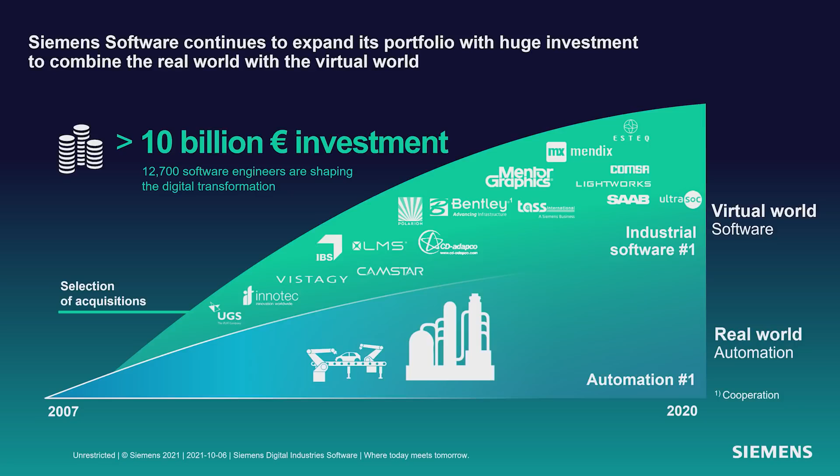One of the reasons we're able to do this is our investment. Over the past 14 years, we've invested more than €10 billion in bringing in new functionality to Siemens. In fact, Siemens is one of the top 10 software companies in the world. This allows us to bring you Xcelerator. Xcelerator is an integrated portfolio of software, services, and application development platform that really speeds your digital transformation. So no matter what you're doing, whether it's mechanical, electronics, manufacturing, we have you covered.

And it all starts with Solid Edge. Solid Edge is your on-ramp, if you will, to digital transformation. You're probably familiar with lots of Solid Edge capabilities for sheet metal, 2D drafting, etc. But maybe you need to go beyond that with the whole Solid Edge portfolio and Xcelerator, whether that's managing data, doing technical publications, simulation, electrical, it's all there for you.

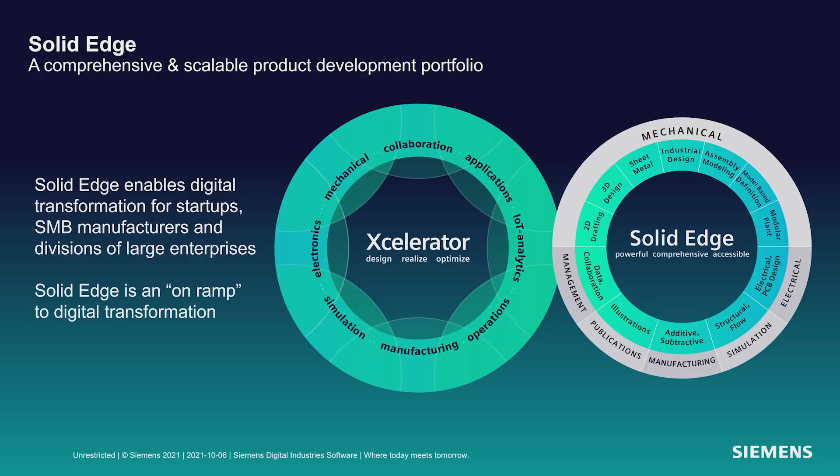And what we see is customers doing amazing things with Solid Edge and the Solid Edge portfolio. For example, Inovates. Inovates is a company in Belgium that makes mobile charging stations. And they're able to take Solid Edge and PADS Pro and use those two together to do great things. As you see, they don't find that level of integration in other engineering software.

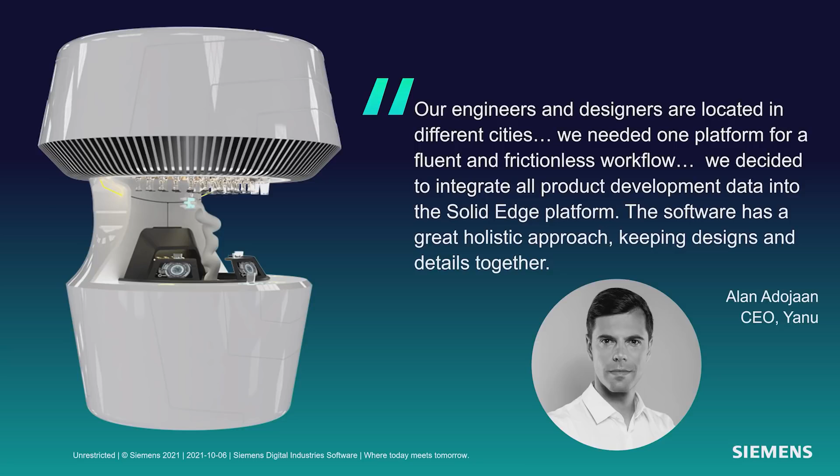Another great example is Yanu. They make the beautiful product you see on the left here. What product might that be? Probably something you've never seen before. This is a fully automatic digital bartender. It can recognize you, make the proper drink, do the proper billing, all contactless, very important today. And I love what Alan has to say. The software has a great holistic design approach, and that's what we like to see and how we can bring you more productive software.

So let's talk about Solid Edge 2022 itself. Solid Edge 2022, engineered to grow your business. There's so much in it, we'll only be able to cover some of it today. Things like Xcelerator Share, allowing you to collaborate with customers and suppliers. Or CAD Direct, integrating CAD files from other systems directly into Solid Edge seamlessly. Point Cloud Visualization, big scans of plants, being able to design your equipment in context of that big scan. Solid Edge Design Configurator, a whole new capability to configure your designs quickly and easily for your customers.

Now, as we go through our discussion today, we're going to be using two different data sets because there's just so much to see, such a broad range of functionality with Solid Edge. We'll be working with an espresso maker from Fiamma, a company based in Portugal. And we'll also work with a product from Bergner, a company based in Switzerland that makes chemical and pharmaceutical custom machinery.

So let's start by talking about mechanical design. And let's start with CAD Direct. CAD Direct lets you seamlessly integrate data from other systems into Solid Edge without translation and automatically take updates. We'll also talk about convergent modeling. We've been working on this technology for several years now. It's getting very sophisticated: the ability to integrate mesh models with BREP or solid models in one seamless way. So let's look at that with Jeff now.

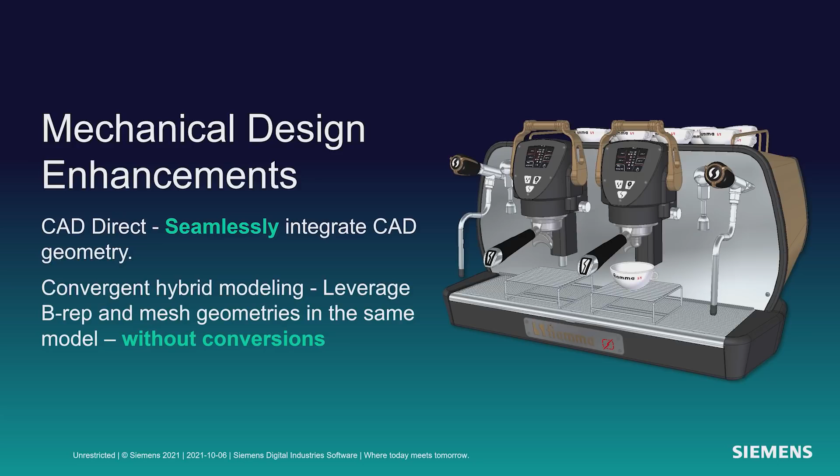Thanks, Dan. First, we'll take a look at subdivision modeling. In this example, we will add support members to the base of the Fiamma espresso machine. The new subdivision bridge command can be used to easily connect edges or faces of subdivision cages and create a lofted structure between them. Here you see an example of that, where we'll select the faces of each subdivision model that we want to loft between.

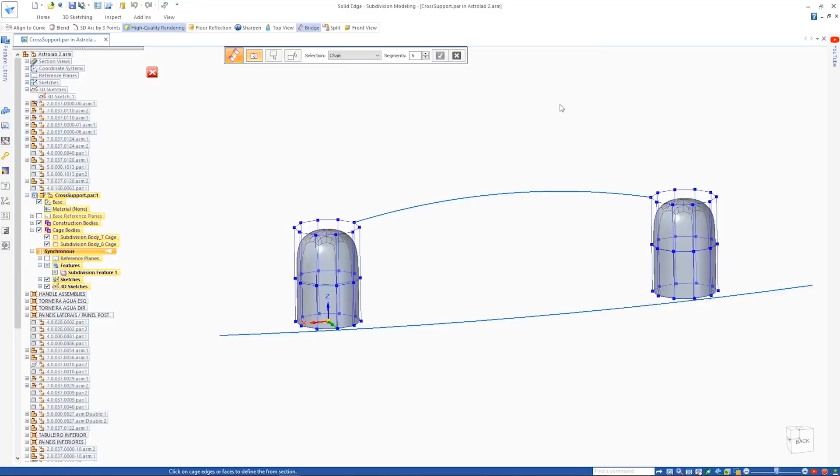Then we'll add the control curve to help us further define the overall shape. Next, we'll be using the new Align to Curve command to further define the shape of the part. Simply by selecting the cage vertices to define the direction and then picking the curve, those vertices automatically map to the curve. You can even sketch your own shapes and curves inside the context of the command. Even gesturing is supported for inking of your curves.

Here we'll show another option called Split with Offset to add some pockets to support the rubber feet of the support. A simple selection of the edges with an offset allows you to pull to create the pockets for those rubber feet. Next, we're going to replace the handle with a new design that's been 3D scanned.

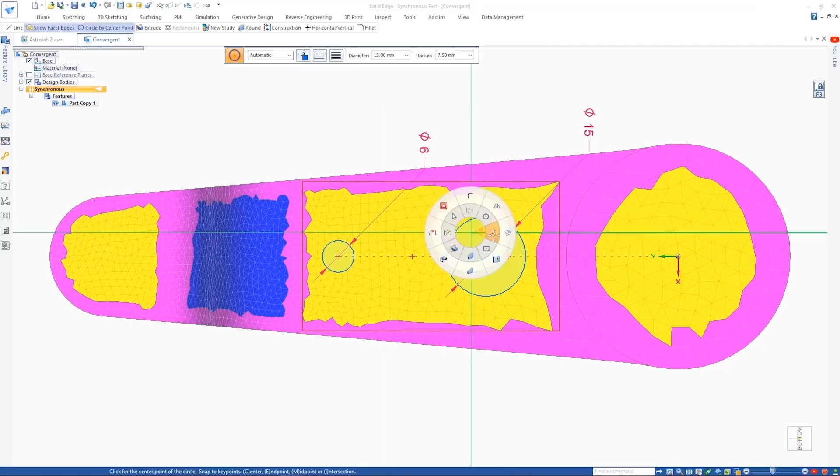This result is a mesh model that we import. We can visualize the mesh with the new Faceted Edge command. In this case, we'll clean up this model a little with the Remesh command. Now, faces have automatically been identified and the sketches are added to the planar faces of the mesh. We add a series of cutouts in order to reduce the weight and improve the appearance of the part.

Notice the resulting geometry isn't faceted. Solid Edge now seamlessly combines mesh and BREP geometry in the same body or part. We'll add additional cutouts to reduce the material. Once the cutout is complete, it can be patterned.

Finally, we're back in the assembly where we'll replace the current handle with the new meshed handle. But you'll notice the mounting holes are missing from the component. This can easily be solved by doing a Boolean operation using the mesh model as the target and the components from the assembly as the cutting geometry. These new capabilities further enhance your ability to use mesh models in your design process.

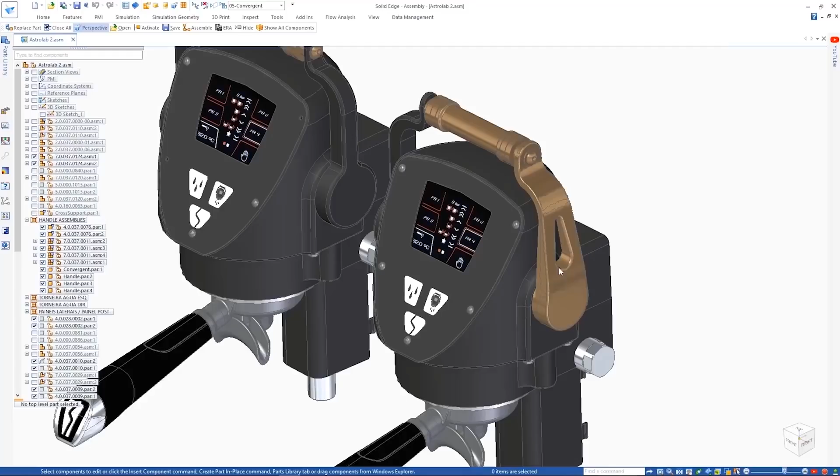Now we'll use the new component finder in the Solid Edge Pathfinder and we'll search for the desired filter holder handle, which is designed as a family of assemblies. One of the versions is designed for a double espresso shot, the other is a single espresso shot. Opening the drawing of this assembly, we'll use the new family of assemblies parts list to place a table and detail the parts used for each member.

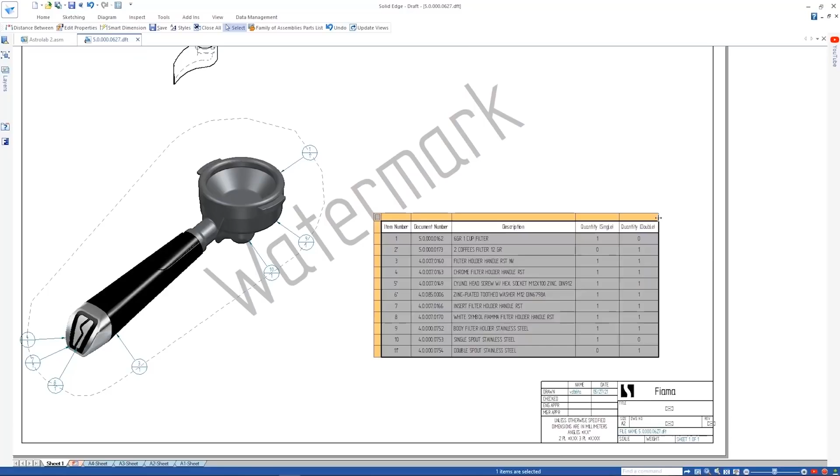Now we'll look at some enhancements to dimensioning in Draft. Dimensioning to virtual intersections or arcs of rounded edges is now supported. We can also choose to display projection lines to those intersection points. Watermarks are also used to convey important information on the drawing. We'll change the existing one so that it retrieves the document status for the drawing property text.

The new CAD Direct command enables us to use foreign CAD data, geometry, and assemblies in Solid Edge directly without requiring any translation. The water boilers that you're looking at here were designed in NX. Once inserted into Solid Edge, they can be positioned just like any other assembly. Since we need two of these, we'll simply copy one to create the second.

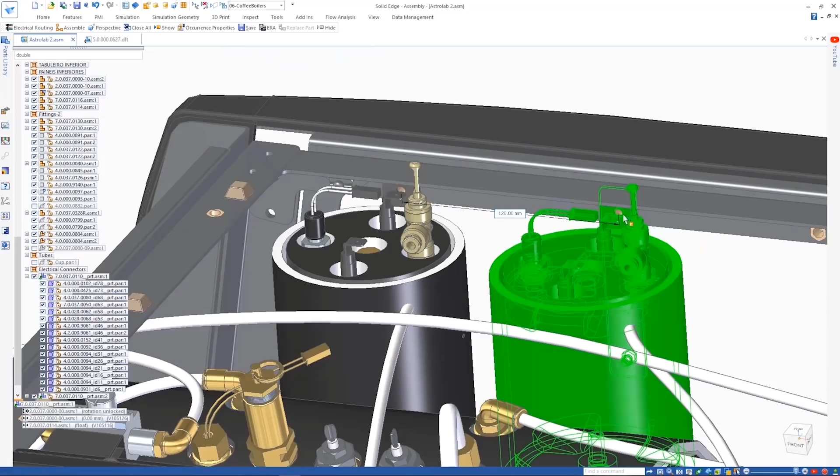Notice the boilers aren't quite in the right location. We'll go back into NX and make the changes needed to the mounting bracket such that they'll be in the right position. Since Solid Edge has associative links with NX, a simple update brings the changes in.

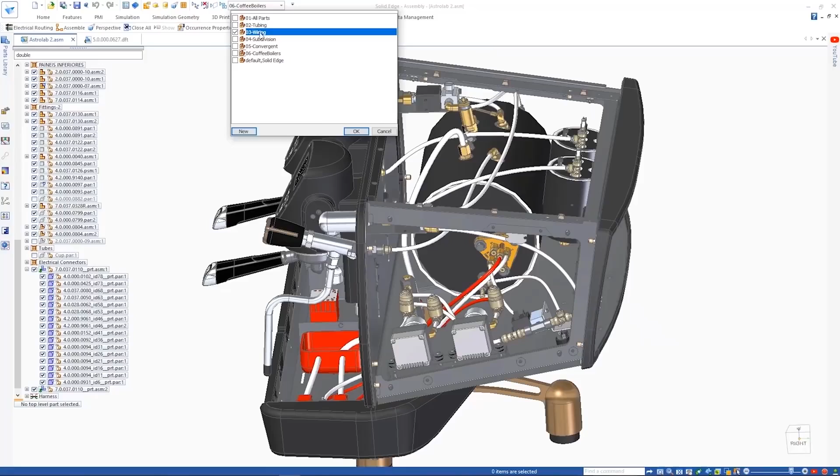Next, we'll look at electrical routing enhancements. Solid Edge now supports the display of bicolored wires, allowing us to change the display of this ground wire to be striped green and yellow. Various pattern types are supported as well, including single stripes, helical stripes, zebra stripes, and dashes.

And finally, KeyShot, the best-in-class rendering solution, also sees some impressive updates. Decals defined in Solid Edge may be automatically transferred, saving time and effort, which can be seen here on the logos and the cups in the digital scene. Back to you, Dan. Thanks, Jeff.

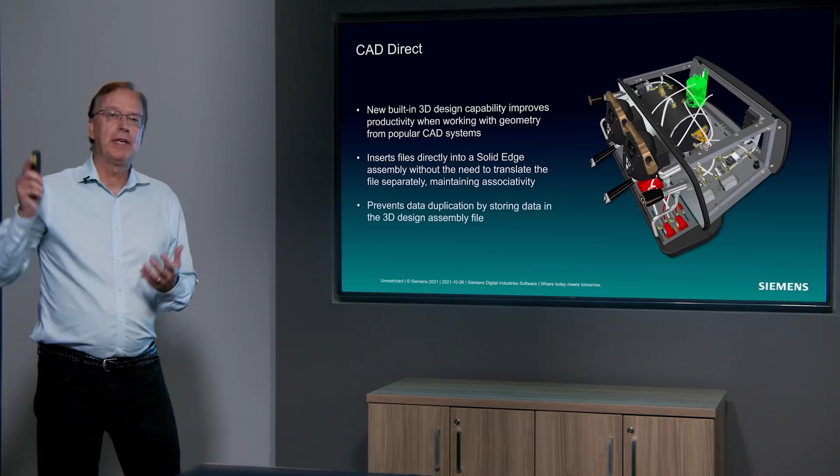Lots of amazing stuff in there, but I'm only going to highlight a couple things here that I think are real game changers. CAD Direct. So you have the capability you've seen to get an NX assembly into Solid Edge directly, no translation. And when you make edits to that NX assembly, it comes into Solid Edge automatically. There's no extra files to manage. You don't have to worry about that.

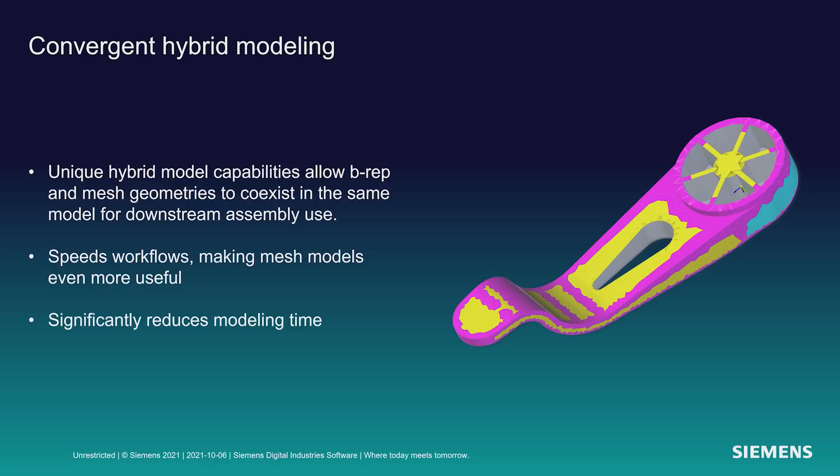It's all CAD Direct. And what about convergent hybrid modeling? You saw taking triangle meshes and b-rep solid models, pulling that all together into a single cohesive model, significantly reducing your design time. Let's talk about some other mechanical design enhancements, some other great things in here.

Point clouds. It's becoming fairly common to be able to scan an entire plant or factory and bring that data forward. We can now bring that data into Solid Edge so that you can design in the context of that factory or plant. What about large assembly modeling? We see people first building parts, then assemblies, then whole factory lines. Assembly modeling in Solid Edge keeps getting faster and faster, best in the business.

And Synchronous Radiate, an amazing new command within the synchronous modeling environment that allows you to deal with radially symmetric parts and edit those effortlessly. So let's take a look at that now, Jeff.

Thanks, Dan. Well, the first thing we'll do is we'll take a look at a new assembly preview mode. This mode allows you to very quickly open Solid Edge components and very large Solid Edge assemblies lightning fast. In preview mode, you can manipulate the view, show and hide components, and apply display configurations. In this case, we'll isolate the most critical part of the model that we want to edit using a configuration. Then we'll simply tell the system how we want to open, and open only the components that are to be edited, saving you time and memory.

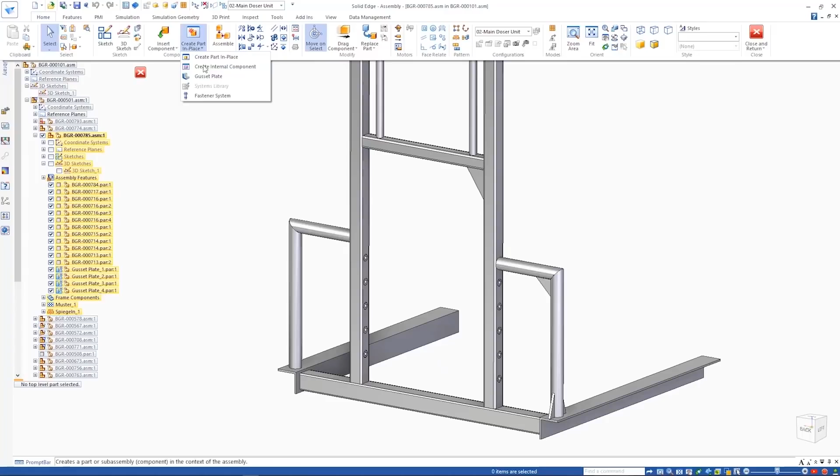Another time-saving enhancement is the gusset command. We now allow you to automatically add gussets to a frame structure. Here you can see the user interface. You can define these gussets in any shape and size that you desire. Then you simply select the frame element, position where the gusset is to go, and the system automatically creates the component there.

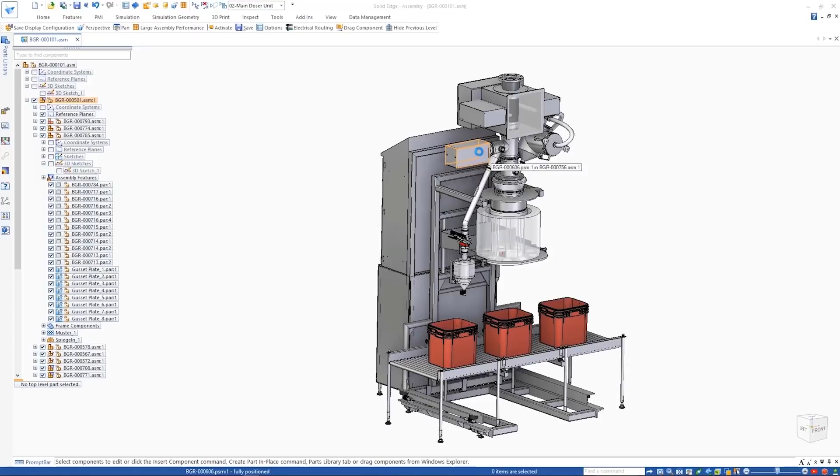If we continue down the internal components theme that we introduced in the last release, we now allow you to create an internal component and actually create the model geometry directly inside the Solid Edge assembly. We've introduced this new assembly modeling capability that gives you the ability to create the entirety of a design without any need for an external file. Here we have a pneumatic cylinder which will be imported as an internal component. We need to add a bracket to this assembly, but since it's a purchased part, we'll just create this as an internal component. And again, saving the need for external tracking of files.

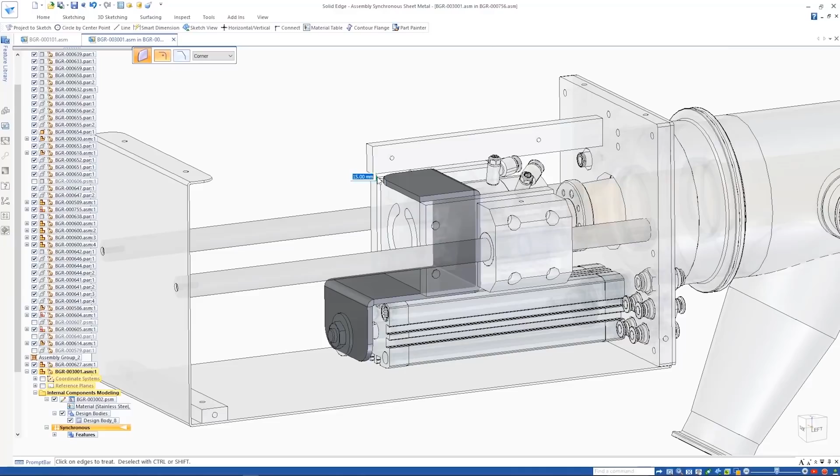If you'll notice during sketching, a pop-up menu allows you to quickly access commands that are relevant to your selection. And this is new for Solid Edge 2022. So we've defined our sheet metal part. We also will have to give it a material definition and a gauge definition. In addition, we're able to create geometry and reference the components from the assembly, whether they're internal components or they're real components in the assembly. So again, we're defining the material gauge for the sheet metal component, and we've defined this component completely inside the context of this assembly.

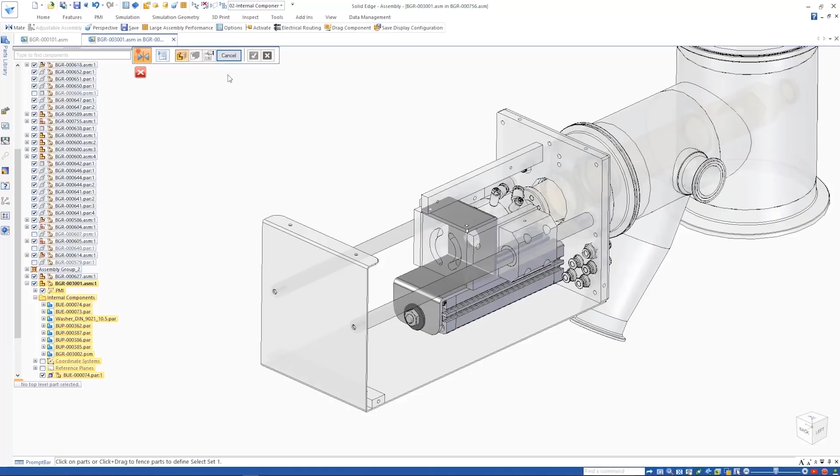You're also able to drag the component, doing animations using both internal components as well as the real component combined. The new component finder speeds up the process for locating parts within the assembly. You simply key in the name and it finds the list quickly. Here we found a shaft, and we use the new radiate command to edit the radius or the diameter of the shaft component. You simply select the shaft, putting the component in the select set that you wish to change, and then Synchronous does the rest. In this particular example, we want to include the pocket in the radiate and the offset option. Simply selecting that pocket and including it allows that to be done.

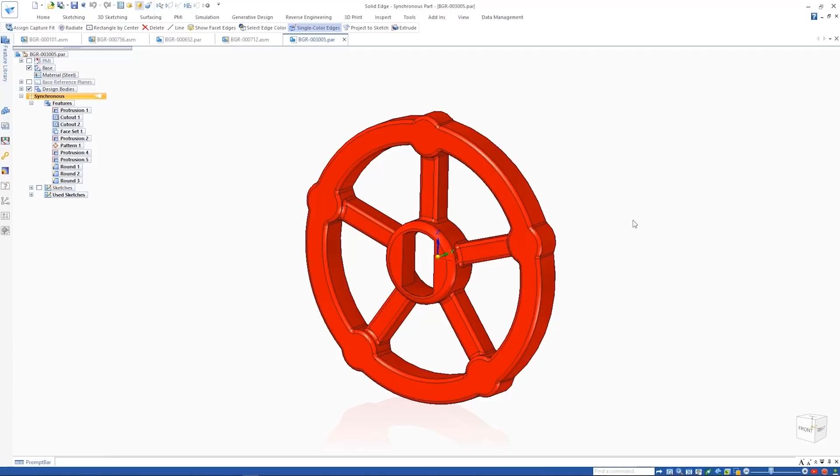A new Assign Capture Fit command allows relationships to be predefined on a component while in the context of the part. Here you can see that Capture Fit relationships already exist. We'll add a new Capture Fit to the collection and save it to the component. When I place the handle into the assembly, all you have to do is select the component and select the mating components that you want to mate it to, and the handle automatically snaps into place. It's as easy as that. Here's another example where we have a handle that needs to snap to 5 new locations. Again, the Assign Capture Fit makes it easy.

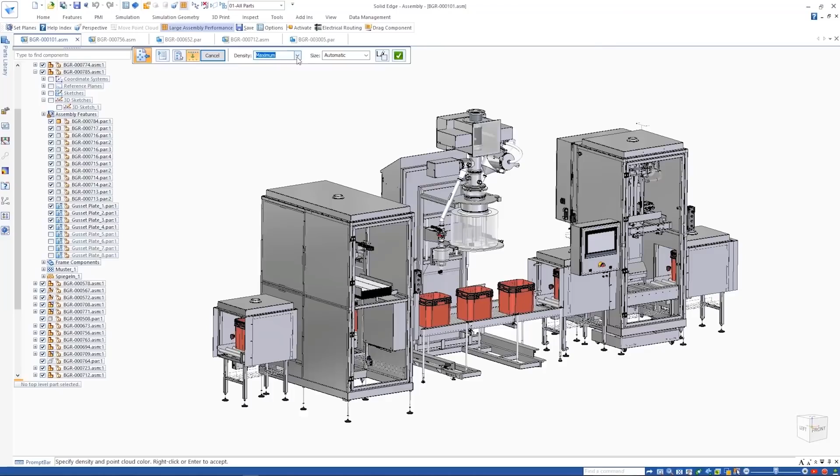Solid Edge now has the ability to place point clouds within the context of your design. This allows you to reference and visually indicate where your components will be placed inside a large assembly. Solid Edge supports multiple point types and then allows you to position your component inside the context of the plant design. The point cloud can be easily repositioned. Clipping planes can be used. You can even measure to the location of the point clouds relative to your design. Here you see that the tank component was in the wrong position and it was moved to match the point cloud and the plant definition more precisely. And that's it, Dan. Back over to you.

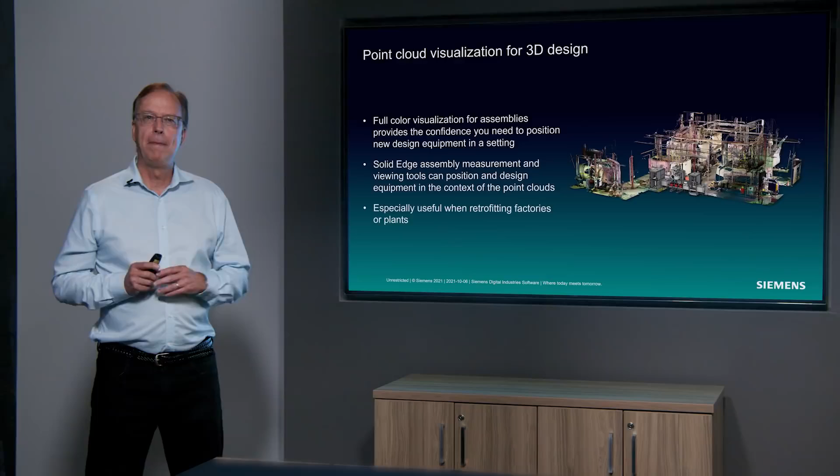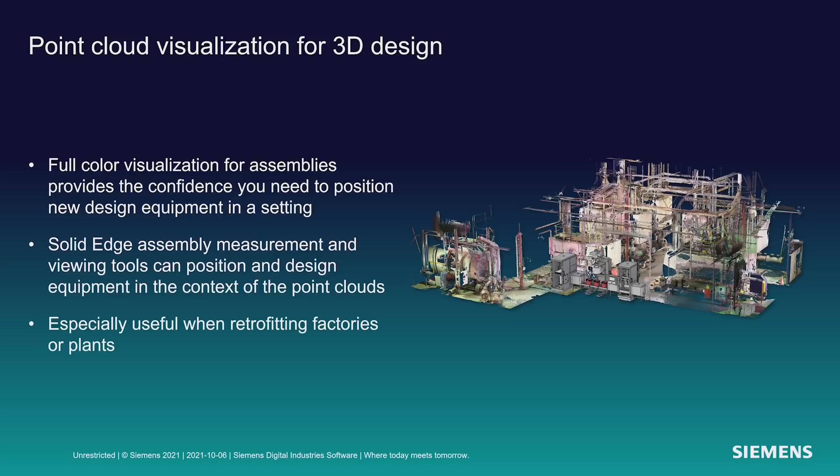All right, thanks, Jeff. So many great things to see in there. But again, something I really want to highlight to you is a game changer: point cloud visualization. The ability to take scans in, gigantic scans, millions or billions of points, and be able to look at those in the context of Solid Edge and be able to integrate your design directly in there and design in context of that point cloud. As you can see, they're full color, they give the full feel of the plant or factory. Really amazing stuff. And we see that our customers really love this new technology. So Benjamin at Bergner, for example, eliminated a lot of tedious manual effort. It's just so much easier with the new point cloud technology.

And what about large assembly modeling itself? Order of magnitude increase in large assembly modeling performance. So you have that preview mode where you can very quickly bring up the assembly, very, very massive assemblies, decide what you want to work on, and then just bring in that bit of the assembly. Really improve your productivity.

And we see that folks are already taking advantage of this. Our beta customers have been using this, like Luca Carminati at CMS. Much, much faster work, save a lot of work on their designs.

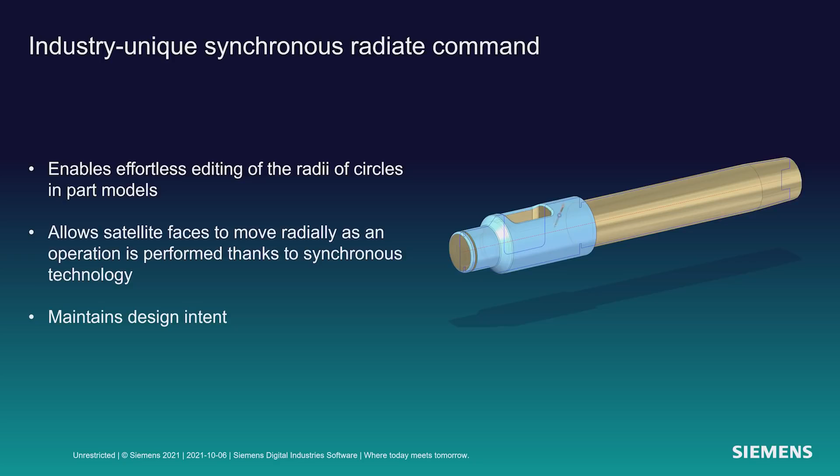And what about synchronous radiate? Really amazing stuff if you're working on those axisymmetric parts. Being able to make edits without having to do any extra effort happens almost magically. Great stuff.

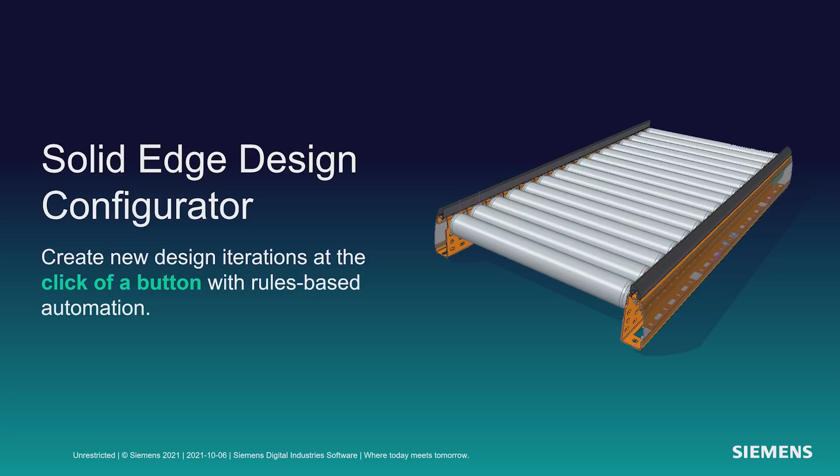Okay, next up is Solid Edge Design Configurator. I'm very excited about this. If you're doing any engineer or configure to order type of products, the ability to very quickly change your designs and have new quotes very quickly. Let's take a look at it with Jeff.

Thanks, Dan. The new Solid Edge Design Configurator allows you to design multiple product variants directly in the context of Solid Edge. In this example, we'll configure a variety of conveyor designs. The first step is to select the component to be configured. The next step is to define the master input parameters of the configuration. In this case, it's the length and width of the conveyor plus the pitch of the rollers.

Values can be easily edited for any parameter, and images can be included in order to help the end user identify the needed inputs when configuring the model. Defining a new input parameter for the pitch of the conveyor, we will quickly configure the name, type, label, and render style to use radio buttons. The pitch value of the conveyor can be customized between 60 and 90.

However, since different lengths of the conveyor require different pitches, visibility rules need to be applied. This is done by making use of a simple expression to define the intelligence. Here, the rules are being validated to ensure the consistency and proper definition have been made. Here, the function is going to be copied and pasted to allow you to easily reuse formulas without having to include them again. Skipping to the last step of the configuration, we can see the configuration form is properly created.

Next, defining the rules for the process. Here we have multiple rules to drive and configure the connectors at the bottom of the conveyor. We will use a combination of simple condition and expression rules and a truth map table to work out the number of positions of the connector. All rules can be quickly validated.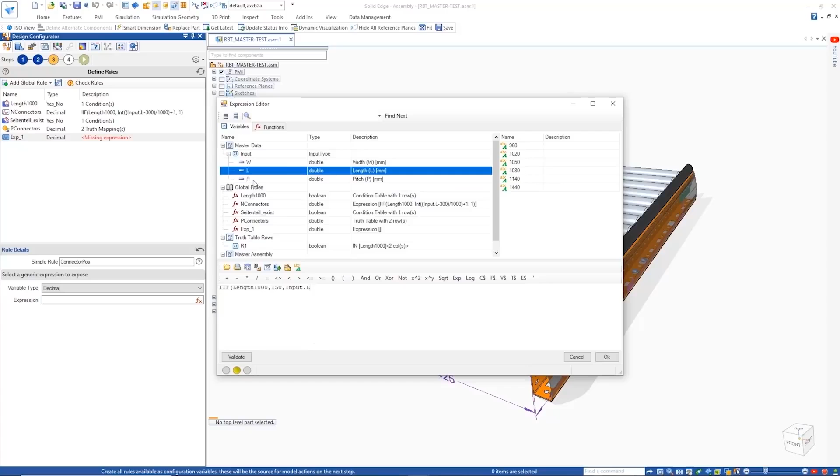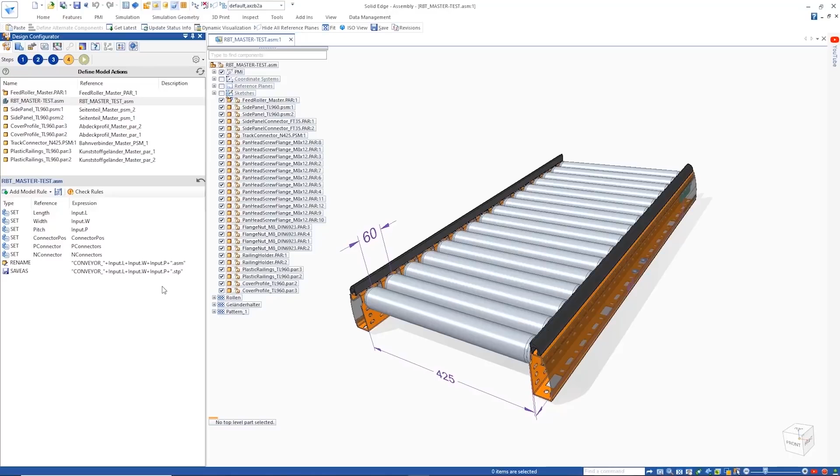Finally, we specify the actions to be taken. Here, variables are set and components are replaced to satisfy the input parameters. A rename model action will ensure our final assembly will be renamed appropriately and also create the other necessary outputs, for example, a STEP file as shown here.

Now we can run it quickly and create as many configurations as needed. A newly generated configuration can easily be shared with Pack and Go. The configuration logic is all stored within the CAD model. There's no need for any further plugins or external resources. And with that, Dan, I'll hand it back to you. All right, thanks, Jeff.

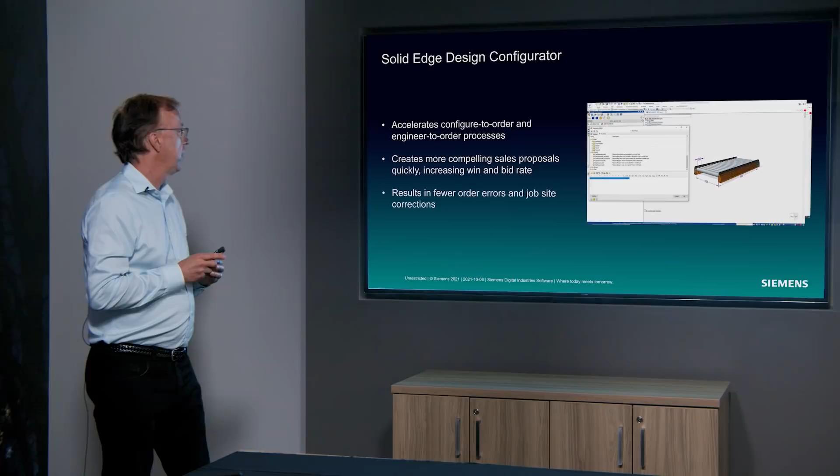So as you see, with the Solid Edge Design Configurator, you can accelerate your configure to order and engineer to order processes and create compelling sales proposals. You're also going to see that it really error checks for you and it creates a nice dialogue for your users to interact with so you can very quickly configure new products.

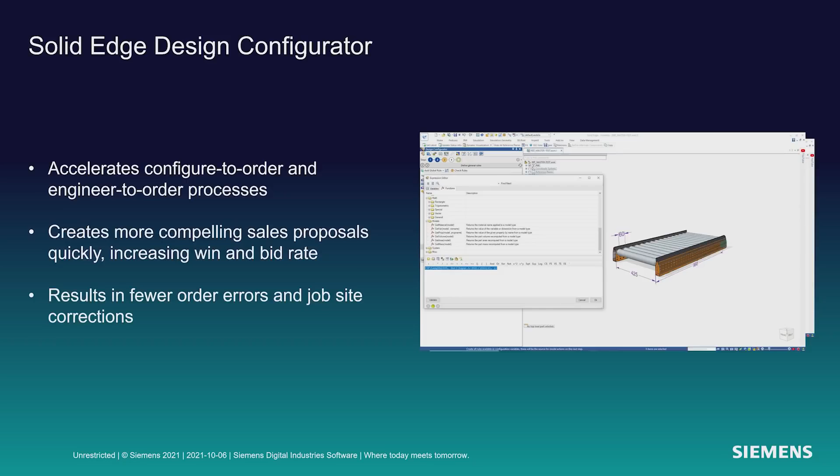What about CAM, Solid Edge CAM Pro? Tried and true technology developed over the last 40 years. A lot of users using it today and enjoy the benefits of it. But what if that technology was available to all of you, all Solid Edge customers on maintenance? That's what we want to introduce to you today with Solid Edge 2022. Jeff. Thanks, Dan.

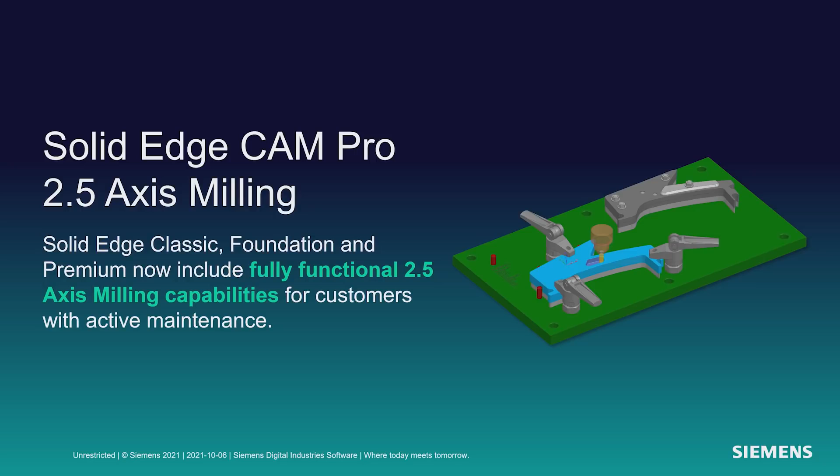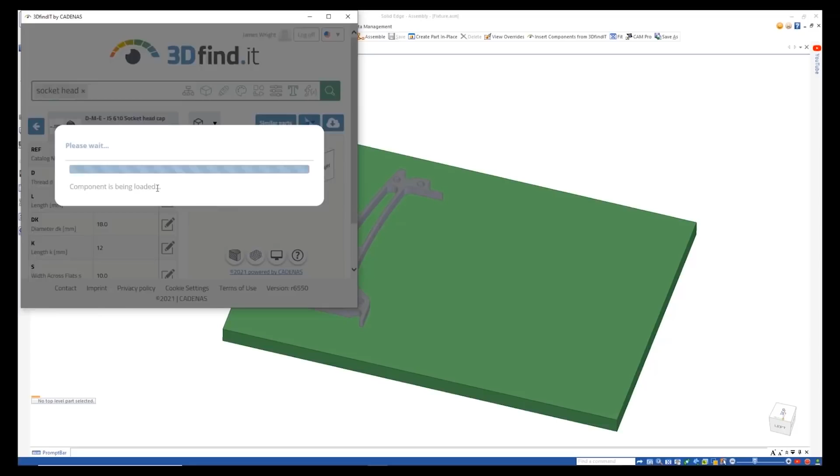Here we'll be using Solid Edge CAM Pro to create the manufacturing toolpath for the rear legs of the Fiamma Espresso machine. First, we'll use the Solid Edge assembly tools to create the shape to represent the stock parts, and also the parts that form the fixture assembly, which includes the standoff plate as well as additional fixing pins from the standard database. We will also make use of supplier catalog in 3Dfind.it to get the appropriate socket head cap screws to be used to fix the component in the fixture. So as you can see, Solid Edge is a great CAD for CAM tool.

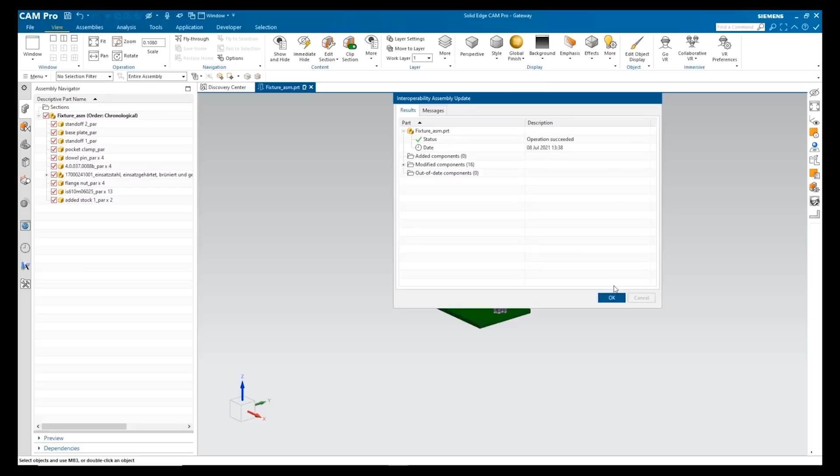We'll need to machine this in two separate steps. Step 1 is to mill the pocket and drill the holes, and step 2 is to machine the profile. One click will send the entire assembly to the Solid Edge CAM Pro application. Note that associativity is maintained to the complete assembly, so if there are any last-minute changes, we can quickly update them and continue the NC programming process.

New for Solid Edge CAM Pro is the ability to create adaptive roughing toolpaths for 2.5-axis operations. This is included at no additional cost. These are faster than traditional toolpaths and extend the cutting life of your tools. Notice the advanced graphic capabilities for validating your toolpath.

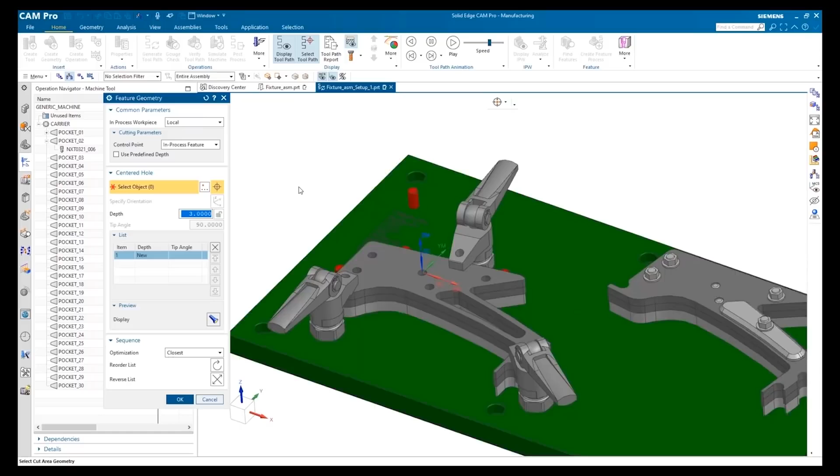Here we'll create spot drilling operations for the 5 holes in the support. Notice the graphical pop-up hints that help us with operation selection. Graphical helps are also available for geometric selection. Each time we select a hole, we get a preview of the machining that will take place. Again, at any point in the process, we can get visual feedback on our decisions.

Now that our CNC program is complete, let's run through the whole visualization process. Notice you get to completely visualize the entire machining process before committing it to machining. Of course, no job is finished until it has been post-processed for a specific machine. That's where PostHub comes in.

It's an online database of over 1,200 post-processors. You can easily filter and find exactly the one you need. Also, PostHub is constantly updated, bringing you the most recent tools. And Dan, with that, I'll turn it back over to you.

All right, thanks, Jeff. I'm really excited about this. There's a great heritage in Solid Edge CAM Pro and our machining technology over the last 40 years. Many people enjoy that technology, but now every Solid Edge user who's on maintenance can enjoy that technology and work with Solid Edge CAM Pro.

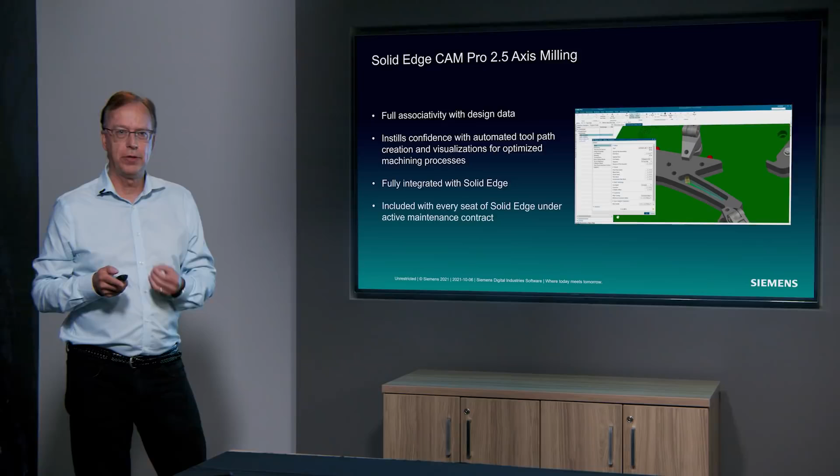Next up is Xcelerator Share. I'm super excited about this. It's a functionality in Solid Edge that allows you to collaborate with colleagues, suppliers, customers very easily. Nothing for you to set up, works on all sorts of devices. So let's take a look at that.

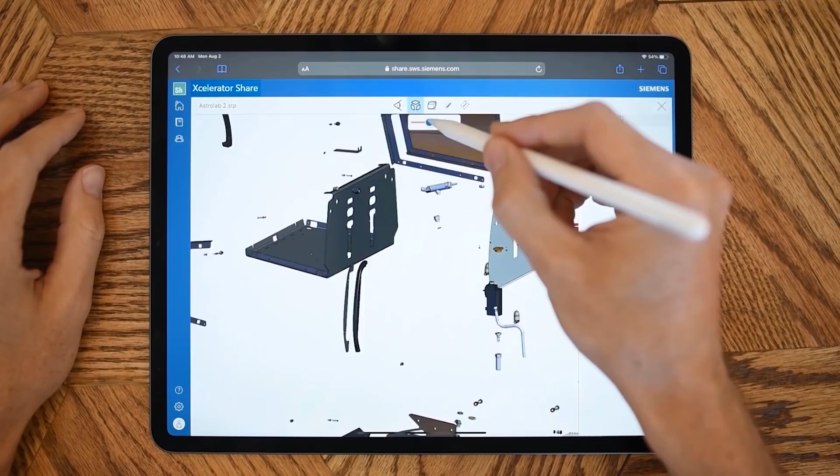Jeff. Thanks, Dan. Xcelerator Share allows you to import your CAD models into a secure cloud location. Within that context, you can view, you can rotate, you can show/hide, you can 3D section, you can even do measurements and markups. Here, a reviewer has identified the need for some change in the design. The location of the change is identified by a sticky note and a place describing the needed change.

Xcelerator Share offers maximum traceability, as all markups are recorded, enabling conversations back and forth on any of the issues you're tracking. It also records who made the markups and when they were made. We can also easily go back to the markups at any time. Simply save your markups and send them to the designer for review.

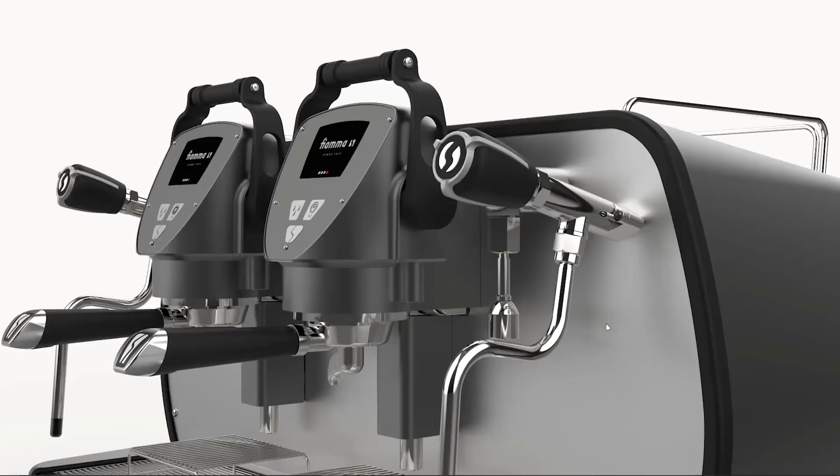With Share, you can also directly connect to Solid Edge, synchronizing your data from your desktop to the cloud. Here we have the same project on our desktop. It's represented simply as a folder. Any data that we have in this folder will get synchronized in the background.

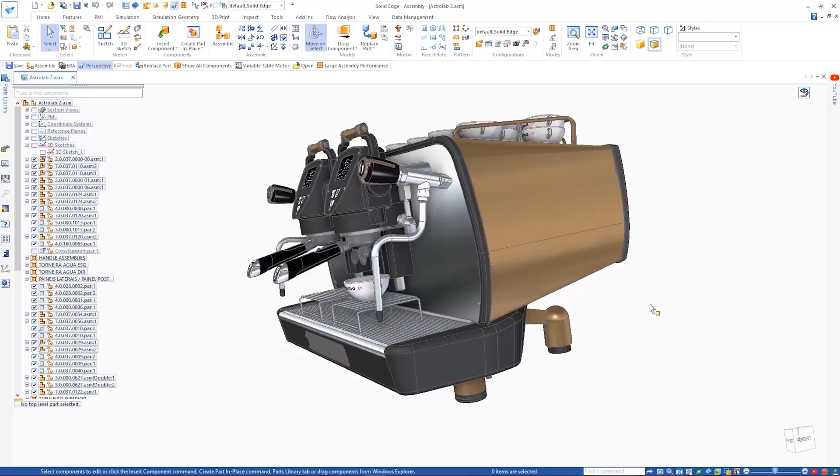In Solid Edge, we can securely sign in to Xcelerator Share and see those same cloud-based projects. The Espresso machine can be opened and we can go right to work on the part in question. The designer can easily access that same markup in the cloud directly from within Solid Edge. Once completing the change, another markup continues that two-way conversation and collaboration with other stakeholders so that the issues are tracked appropriately.

Another great feature of Xcelerator Share is the ability to share a project with anyone. Simply enter the email address of the person with whom you'd like to share and choose their access permission level. Here we can choose View, or View and Download, or Edit and Download, depending on how you want to protect your intellectual property. We'll share this design with one of your colleagues and our customers and give them the appropriate access.

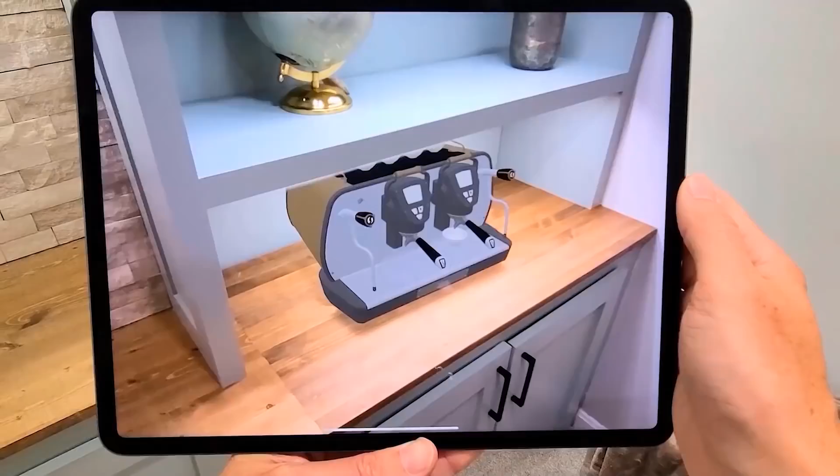Finally, with the Share Augmented Reality feature, you can see exactly how your designs will look in the real-world environment. Snap the design onto any surface seen in the camera lens at the correct scale. Finger gestures can be used to manipulate the model and easily visualize what your design looks like in a real environment. So back over to you, Dan.

Thanks, Jeff. All right, Xcelerator Share. Really great stuff. Next generation cloud-based collaboration that allows you to work inside your company with colleagues or work with suppliers, work with customers. Nothing for you to set up. Works on every device. So whether you have a Mac or an iPad or a Chromebook, it works on all those devices with no special setup. And you saw the ability to write notes that are automatically converted to text, share those markups. Very exciting stuff.

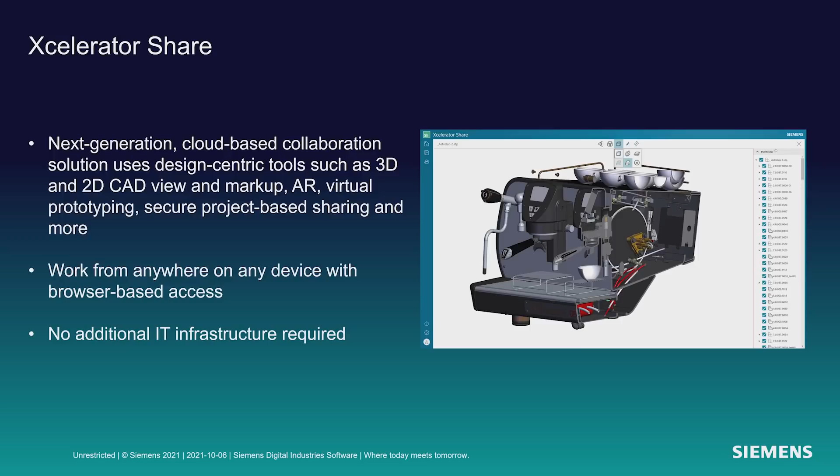Next up's dynamic visualization. You make complicated products, large assemblies. How do you know which parts are from which supplier? Or which parts are of what material? Dynamic visualization will help you with that problem. Let's take a look at that now with Jeff.

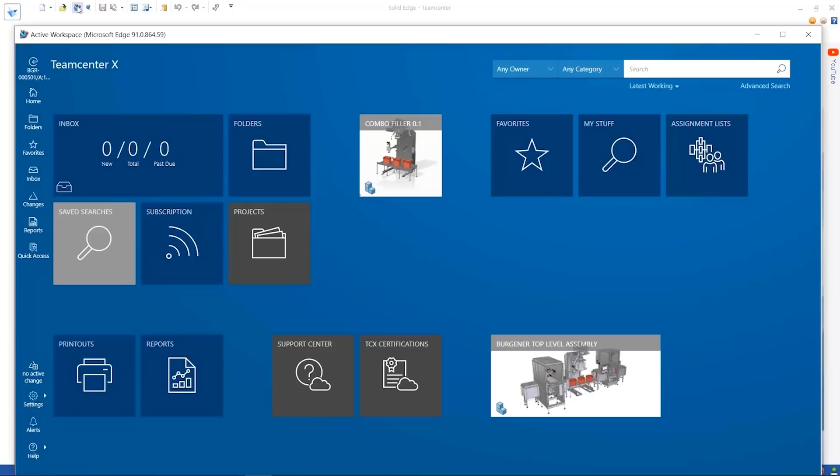Thanks, Dan. Dynamic visualization gives you the great capabilities to generate visual reports of your assembly. So what we'll do here is we'll open a Solid Edge assembly using Teamcenter Active Workspace. We'll create a visual report based on the component supplier and the material definition. So the first thing you'll do is you'll add columns to the user interface, those columns that you want to filter on. Here we've added suppliers and material. So for each of those, we'll filter on the particular material and the particular supplier that we're interested in visualizing.

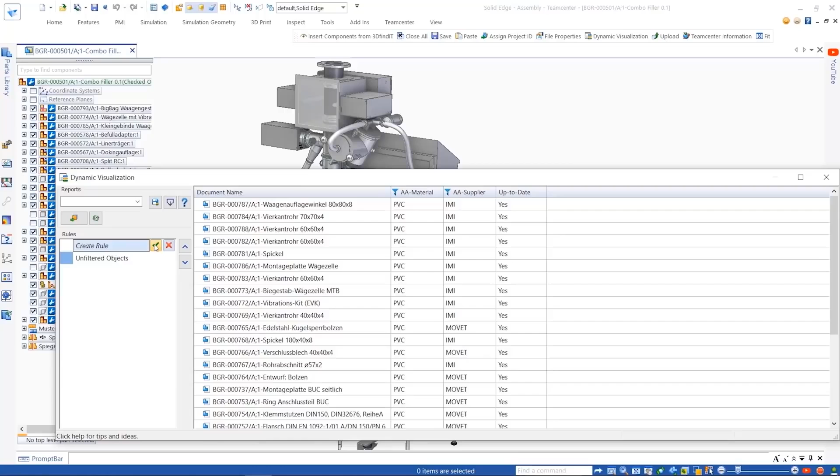So once the rule is created, you simply apply the rule and the model changes display to show you the rule definition. And here you can see in red the components based on that supplier and that material selected. You can also export these rules and import them into various assemblies. Here we have a rule that allows us to identify which user created which components. We'll modify that rule to allow us to identify work in progress as well as components that are created by Pat.

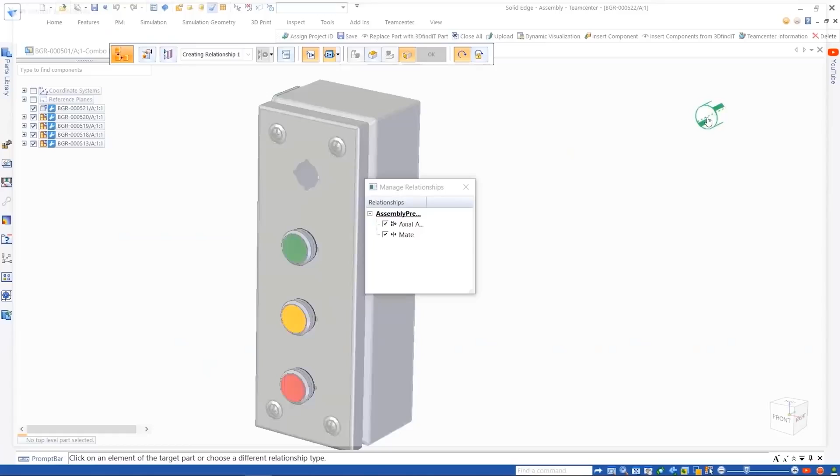We can highlight those, select those, and then go into edit mode. Here we'll see we need to add a warning light to this box. We use 3DfindIT to find the particular light from the particular supplier that we want. Once we've identified the right one, we'll generate the component in Solid Edge. But in this case, the component already is contained in the Teamcenter database. So instead of replicating that in the database, we'll simply reuse what's already there.

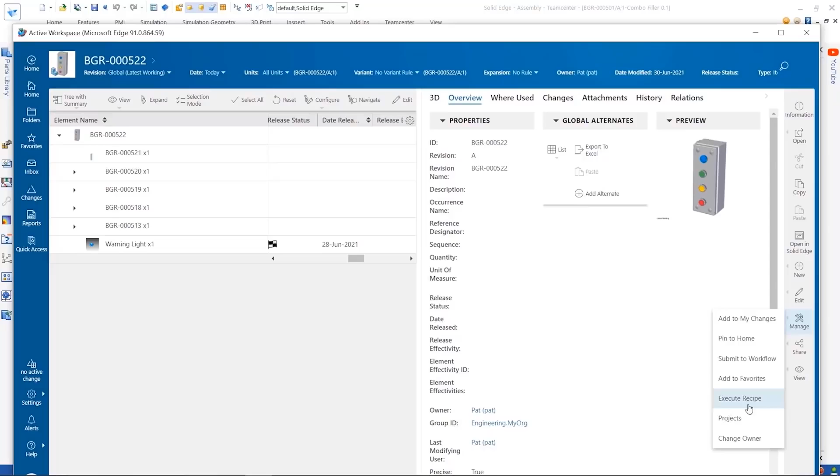Also in Solid Edge 2022, we were able to take advantage of the project definitions within Teamcenter. Here we can see we've assigned the components to a particular project in Teamcenter. The Solid Edge built-in data management also supports dynamic visualization. Here again, we'll display the assembly coloring based on the material type to ensure that we have the proper materials throughout the model.

So again, the rule is applied, visually it's displayed, and you'll notice that the red handles should be green. Those should be stainless steel and not aluminum. So we'll send those back to the designer to be reworked and the proper material to be applied. So once applied, we can then do an auto update of the status, and the system will automatically show us the status and then update to get the latest component. In this case, the handles are updated with the proper material. We will rerun the same rule, and you'll see that now the handles are green and therefore in the correct material.

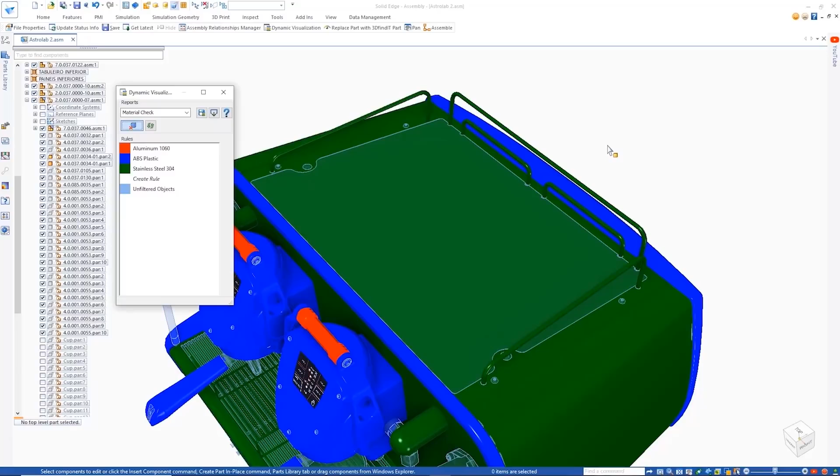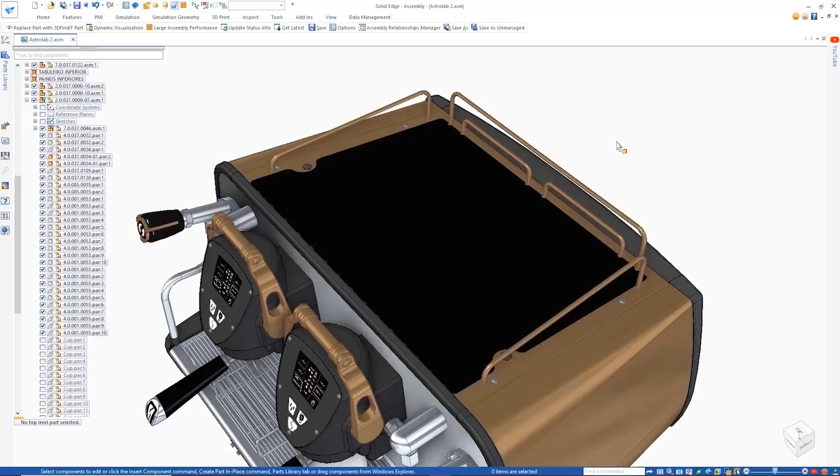Another nice enhancement is that we've modernized the file properties dialog. And you can see here it looks much more user-friendly and lets you easily create new custom properties as shown here. This next example will use Replace Part with 3DfindIT. 3DfindIT has the ability to take a component and use that component geometry to search the catalog database for similar components. Here, once the component is found, we identify the supplier that we desire, and with a few simple clicks, that component is inserted into the assembly, replacing the previous geometry.

And lastly, we've added Pack and Go directly to the Windows Explorer UI, making it easy for you to share your data without having to open the assembly within Solid Edge. And that's it, Dan. Back to you. All right. Thanks so much, Jeff.

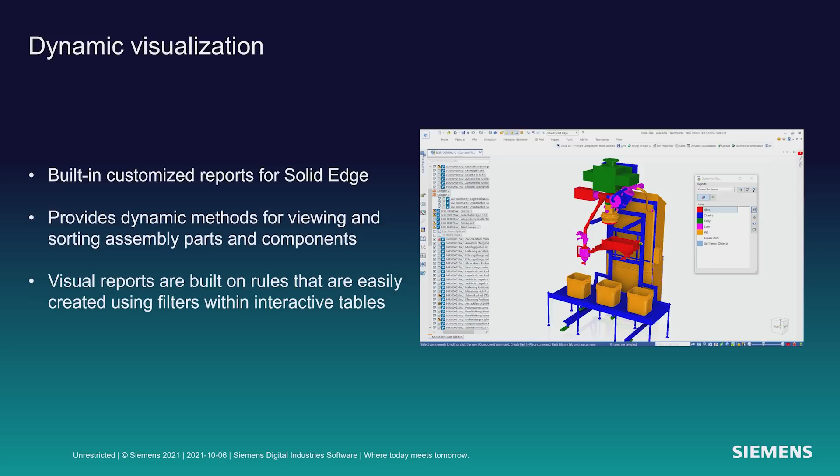So many good things you saw in there with 3D Find It and the ability to replace components, search directly using geometric shapes, and so on. But I want to highlight to you this dynamic visualization. Being able to say, well, what supplier do I have for the different components? Color code for me all the things that are stainless steel. Color code for me all the parts that are in work. Amazing technology that would save you a lot of time and money.

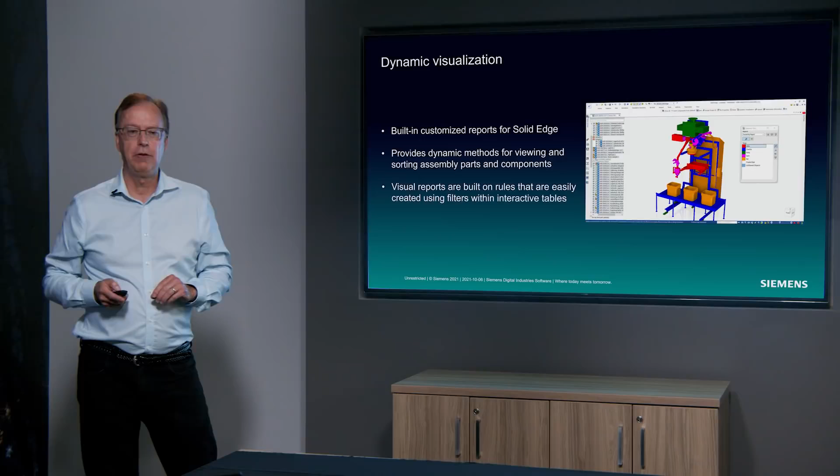Next up is Solid Edge Simulation. We have some great enhancements in there, some game-changing enhancements in terms of the ability to remesh parts using the body mesh command, and some other great tools. Let's take a look at those, Jeff. Thanks, Dan. We'll start by looking at a new boundary condition allowing the user to apply hydrostatic pressure to a model. So we'll apply a configuration that gives us the geometry of interest. Here we want to look at this tank on the left and do an analysis, assuming that tank is filled with liquid.

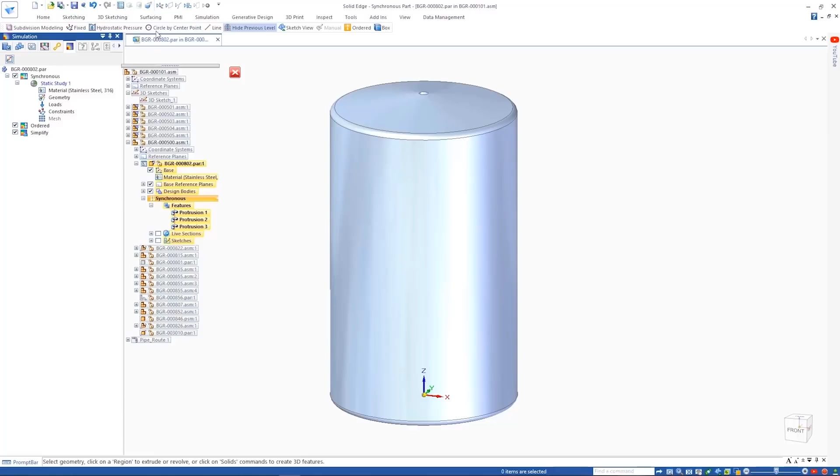So we'll create a static study, and in the definition of the loads, we'll use the new hydrostatic pressure command. All you have to do is to identify the surface to apply the load, identify the depth of the liquid in the tank in this case, and then provide the density of the liquid within the tank. Solid Edge will do the rest.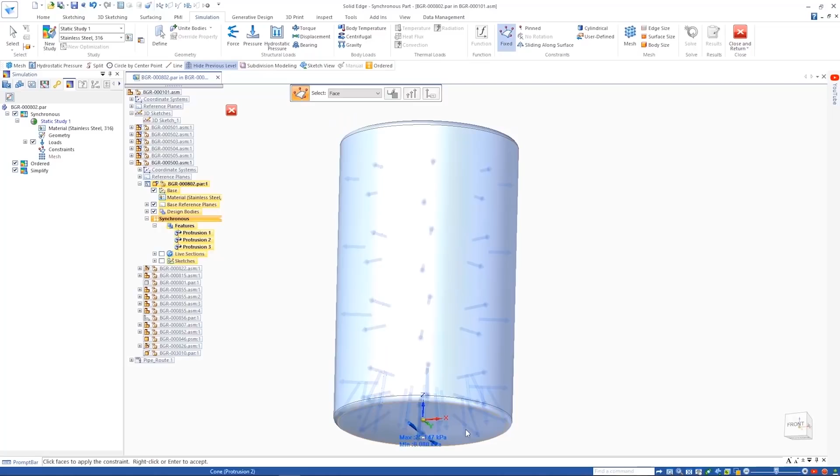To finish the analysis model, we'll apply constraints to the bottom of the tank and then perform the meshing and analysis as needed. Notice on the new mesh dialog a body mesh. This is proprietary technology from Siemens that does a really good job meshing complex models. Some things that couldn't be meshed before can now easily be meshed much quicker and much more reliably than in the past.

So here you see the result of the hydrostatic pressure load in this tank. We'll change the liquid level in the tank and run the analysis again just to validate that this tank will withstand the pressure exerted on it in production. There you see the animation of the stresses, and they show up in the obvious place at the bottom of the tank where you might expect.

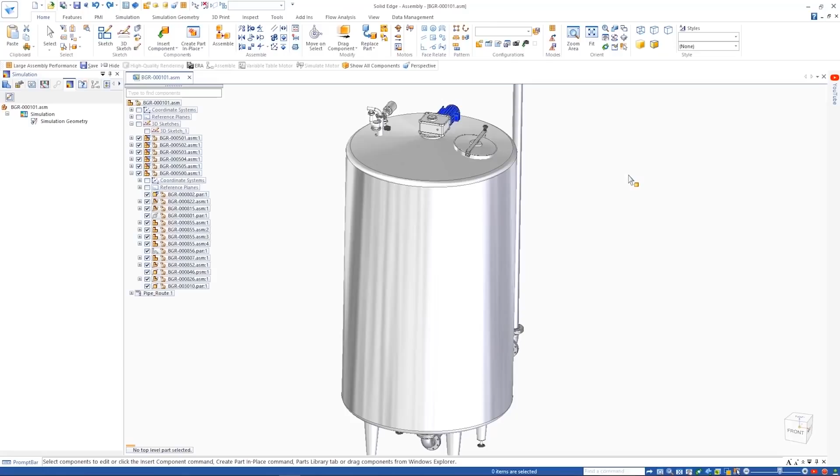Another great enhancement we have in simulation for Solid Edge 2022 is improvements to beam meshing. Here we're taking a frame structure and creating beam elements for the finite element analysis. Notice that the rigid connectors were automatically placed. We've improved significantly our ability to create those connectors automatically without any user intervention.

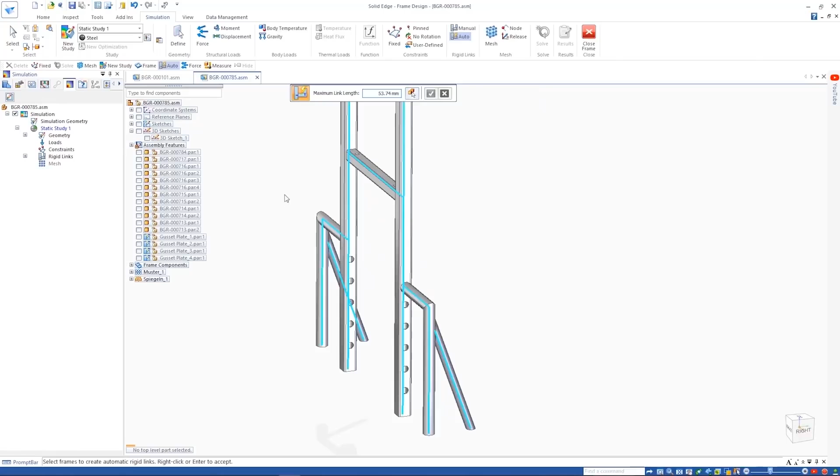Here the user has selected the bottom and changed some of the parameters to get the rigid connections correct. The bottom of the frame is then fixed, loads are applied, and the analysis is run. Once complete, you'll see some enhancements to the output, to the post-processing for this model. We now can post-process and display contours using von Mises stress, and we've also improved factor of safety stress contours based on those same von Mises stresses.

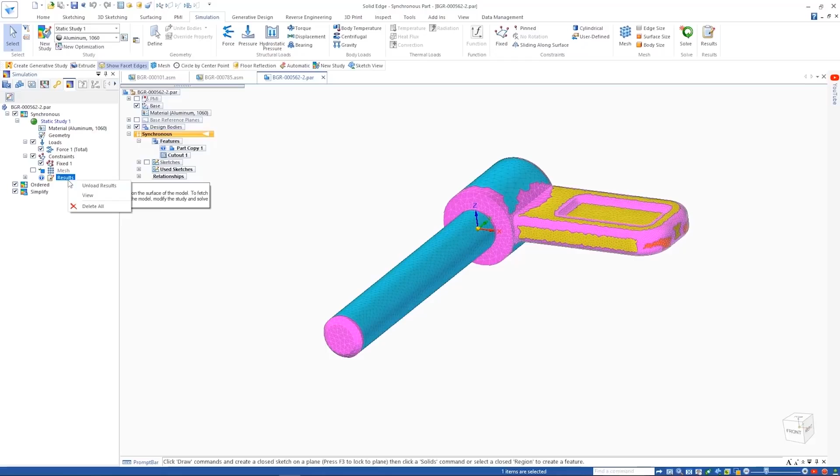Now back to the assembly, we're going to do another analysis on the pin within this assembly. You notice this pin is a mesh model. Simulation can now perform analysis on mesh models. You simply apply the boundary conditions, the loads and constraints where needed, and run the analysis. Here you see the result for the pin on this mesh model. And with that, Dan, I'll turn it back over to you.

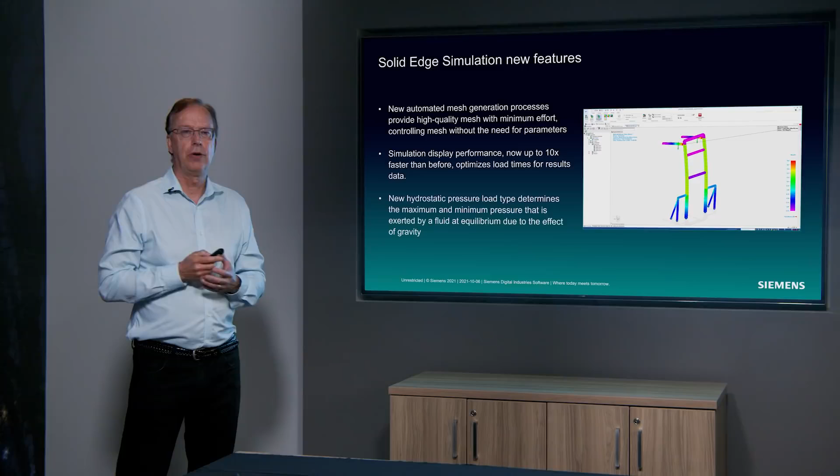Okay, thanks so much, Jeff. Lots of great new things in there. Obviously, the hydrostatic pressure load takes a lot of work out of the process for you. The way the beam elements are automatically connected together, great stuff. But also that body mesher. You can take a mesh that's very irregular, very difficult, and remesh it with the body mesher. It's a game changer for analysis.

Next up is Simcenter Flomaster for Solid Edge. If you're doing any types of products where you have piping and you need to do analysis on the piping or design on the piping and the flow within the pipes, Simcenter Flomaster for Solid Edge is for you. Let's take a look at how it works with Jeff.

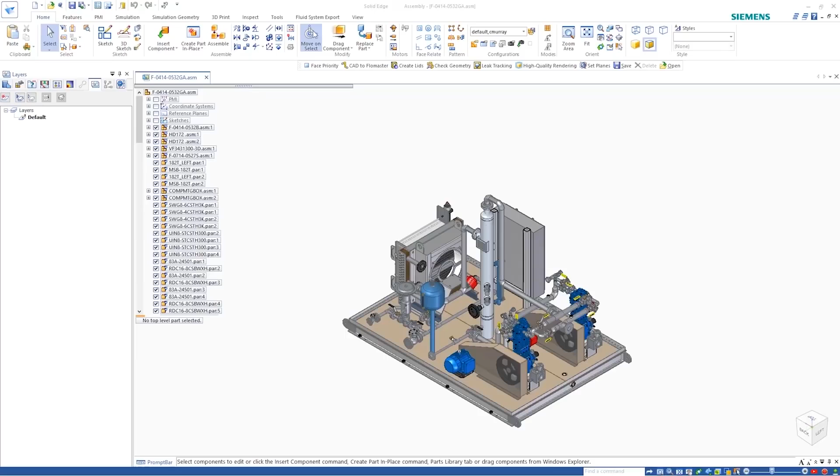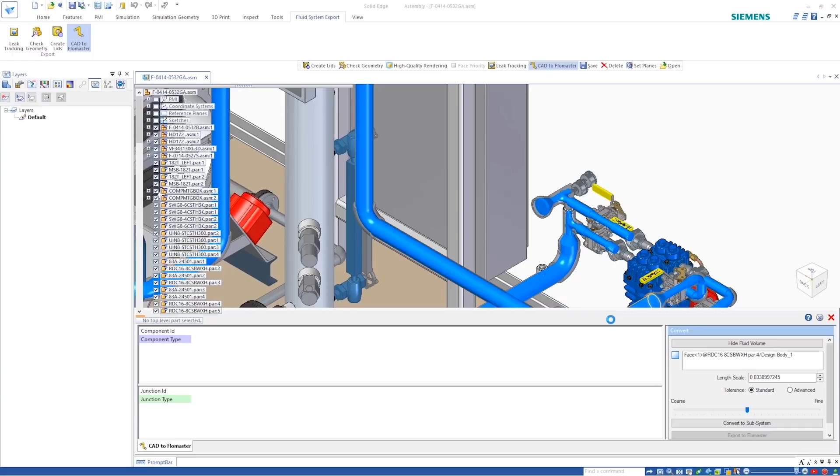Thanks, Dan. The unique CAD to Flomaster technology extracts the geometry from the Solid Edge assembly and automatically creates the corresponding fluid volume that exists inside the pipe runs and components. During the process, a face can be selected to give the length scale and convert the system to a subsystem. The abstraction process is fully automated. There is also full control over the fidelity of the model, which can be adjusted with the slide bar. Individual elements can be inspected, deleted, and merged.

Once the network configuration is defined, the geometry can be exported to Flomaster. Following export, the file will be saved for reuse, then automatically opened in Simcenter Flomaster for Solid Edge in the Subsystem Import Wizard. The CAD geometry, centerline, and component connections can be seen in the wizard, and the model can be rotated to the desired projection when the network is created. On selecting Import, a new subsystem will be created for review.

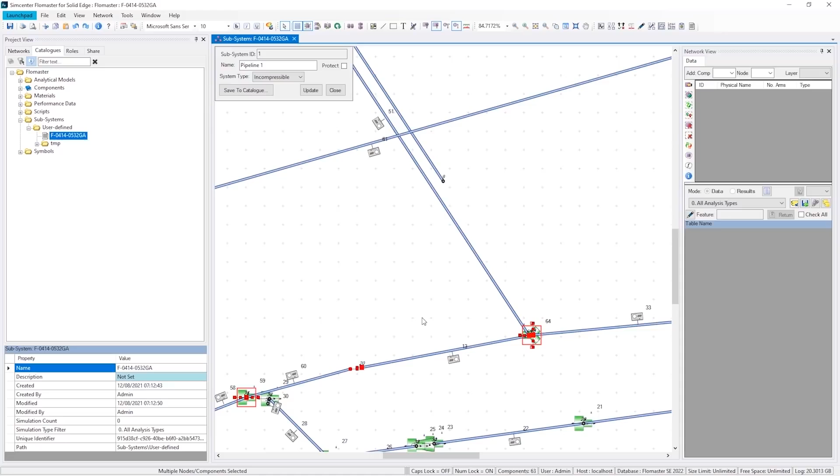The entire subsystem can be used to create a model, or individual pipelines can be extracted into their own subsystem. For a flow analysis of this model, we are going to extract the pipe from the two compressors to the center vessel. We create a second subsystem from the first and save it in the subsystem catalog. We'll now add the subsystem to a new network and specify the boundary conditions using pressure sources. We'll specify the compressor outlet pressure and vessel inlet pressures.

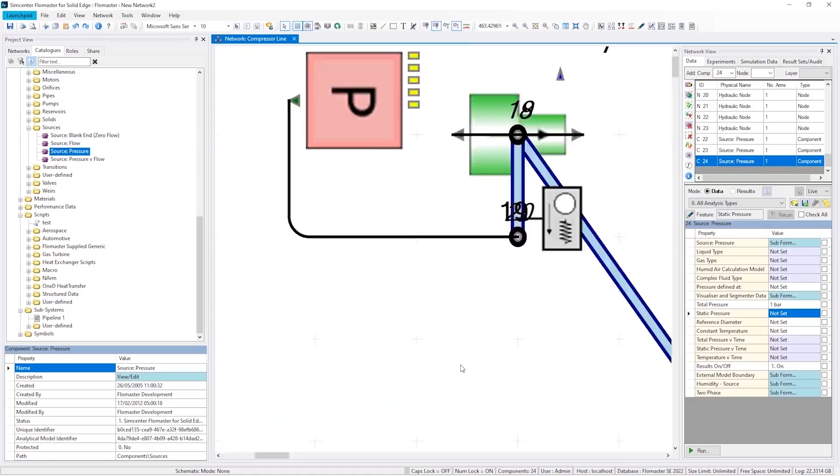For this low pressure system, we'll specify air as the working fluid and run a static simulation. Following the simulation, we can look at the results for individual components or look at the whole system using network visualization. With this, we can quickly oversee flows, pressures, and velocities.

Next, we'll look at the effect of a pressure pulse from the compressor on the system. We'll specify curves defining the pressure pulse and the source, and then run the transient simulation. Following the simulation, we'll look at the flow into the tank, where we can see the effects of the pressure pulse from the compressor. Then, moving to the compressor outlet, we can enable transient visualization to see the variation in flows, and that the larger flow is from the left-hand compressor. And back to you, Dan.

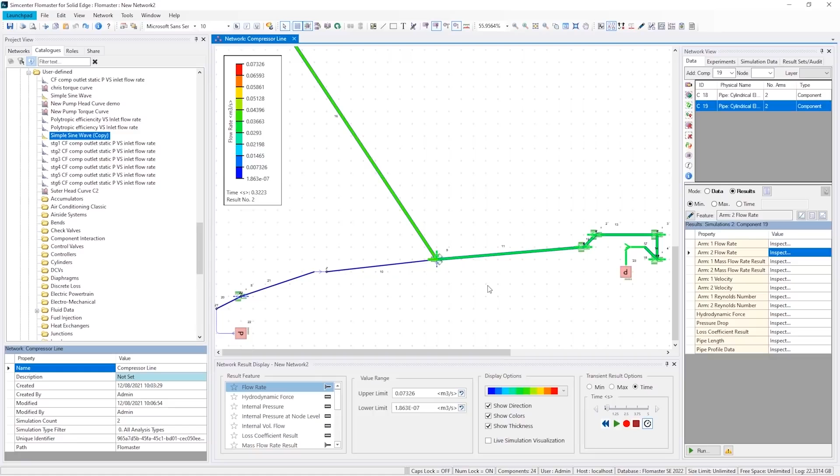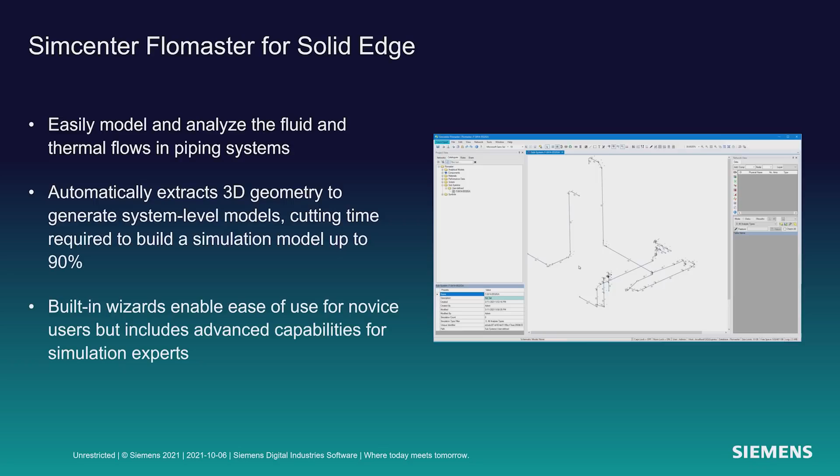Thanks, Jeff. Some super advanced technology there that we're happy to bring to the Solid Edge community. This is one of the advantages of the Xcelerator portfolio, the ability to bring advanced technology to you. Great capabilities here in terms of easily modeling and analyzing the fluid system. The great extraction of the center lines automatically from the 3D geometry, so you can go straight into that analysis and see what's going on with your system.

So that was a feature-packed release, right? We went through a lot of stuff, many things in Solid Edge 2022 that are going to help your business. I have to say, there's simply so many amazing things in there. The number of improvements are enormous. And I think that's been echoed by all of our beta customers. Everyone is saying, this is the best release of Solid Edge ever.